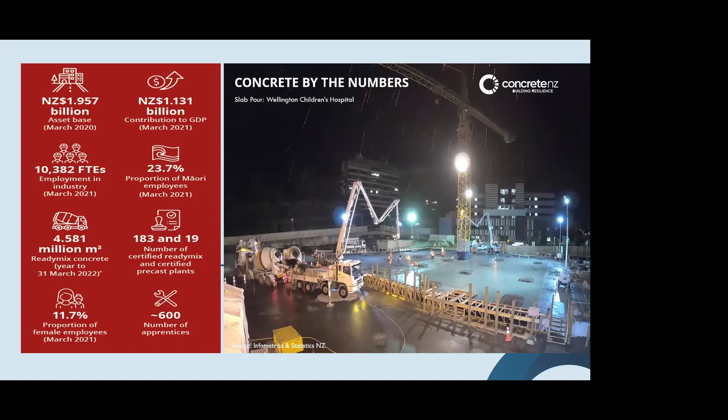So I also want to talk a little bit about concrete in the past, and how concrete can help us get on with the task.

Social responsibility to me means that groups and also individuals are accountable for fulfilling their civic duties, and all actions must benefit the whole of society. There must be a balance between economic growth, well-being, and protecting the environment. As the concrete industry, we have this responsibility as a group, but also as individuals.

Whilst concrete carbon emissions are relatively modest, the issue is that it is the most consumed resource after water. That's why we have to deal with carbon emissions, which amount to an estimated 6 to 8% of all global human-made carbon emissions. I believe concrete has a role to play in a socially responsible society. With concrete, we can contribute to the well-being of people.

Severe weather events have highlighted the need to focus on the twin imperatives of climate change: mitigation and adaptation. Not just mitigation, we have to adapt unfortunately. The impacts from climate change are severe, and adaptation to weather events is necessary when reducing emissions at the same time, for example adaptation to floods.

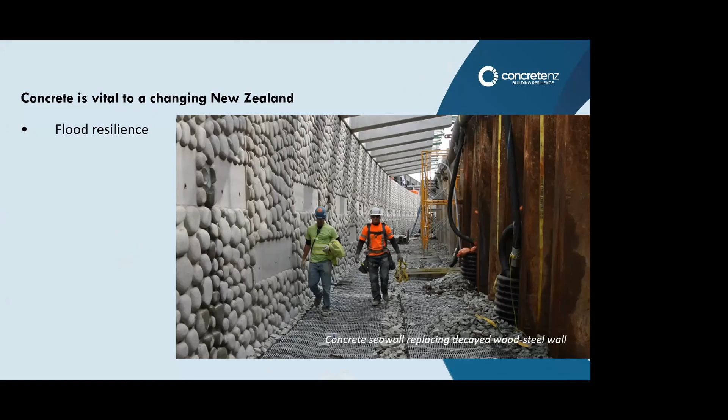There are some great examples of what other jurisdictions have done. For example, in the USA, this is an example from Seattle, Elliott Bay, where they have replaced an existing timber and steel retaining wall and seawall with this concrete wall. It's a great engineering feat, very sophisticated, which includes a marine mattress at the bottom, protecting sea life living in shallow pebbly ground pockets like crevices, and vegetation, and other smaller animals' hiding places, also for young salmon, as I heard.

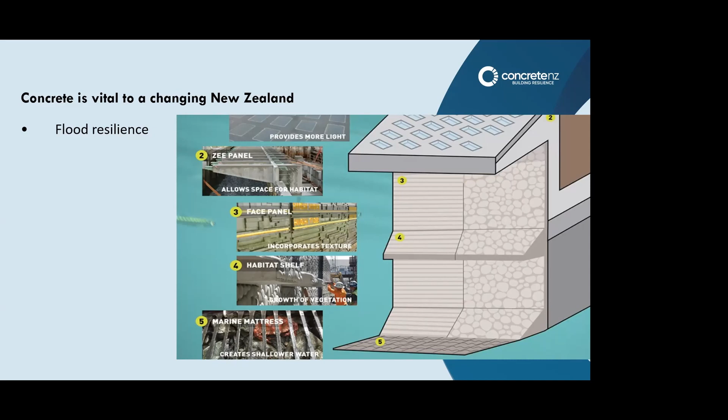This is the same project, so there is light penetrating through this concrete part because they've included glass bricks, so light can get to the habitat area beneath, which again is very important to the smaller parts of the marine life. Textured wall faces allow for growth of shells and other living organisms, and the habitat bench creates a habitat and hiding space for marine life living in shallow waters. So that's one example of how we can not only protect our communities and help from erosion of the land, but also do something for the entire environment, for the marine life as well.

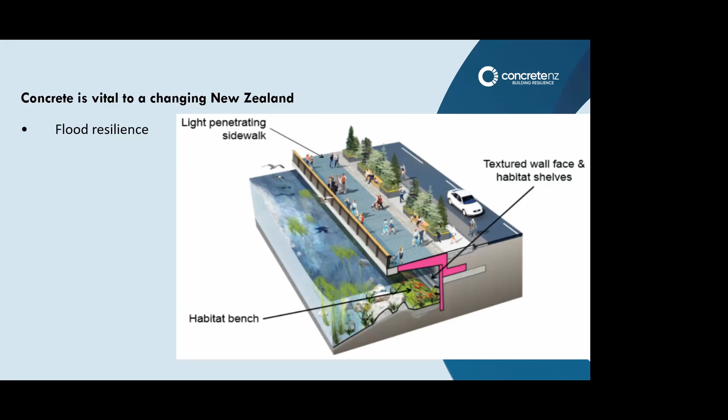Well-being means also the right environment to recharge the batteries, which would be difficult in noisy surroundings. So concrete helps to adapt to changes in the urban environment, for example sound protection at highways, airports, etc. Here's an example many of you will be familiar with - it's at Auckland Ellerslie.

Just for your benefit, how concrete performs: a 150 millimeter concrete wall provides already 55 decibel of sound attenuation. An acceptable noise level in homes is around 30 decibel, 35 maximum, and maybe 25 in bedrooms. For comparison, a jackhammer from a 3-meter distance comes with about 90 decibel. So minus 55 decibel sound attenuation by a wall makes 35 decibel, and obviously the further the noise source away, the better it is.

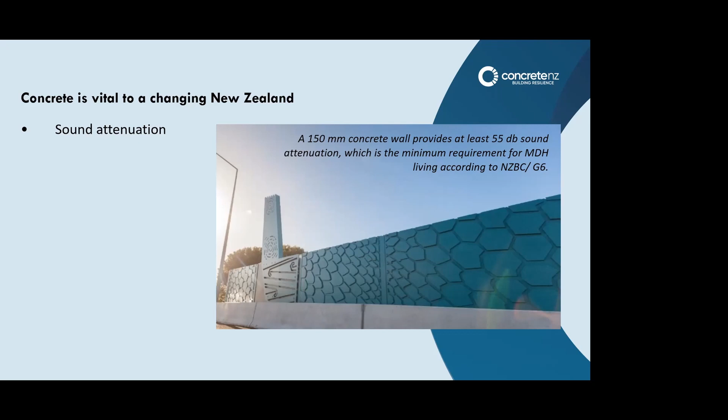55 decibel is also the minimum required for partition walls in medium density housing for compliance with our building code clause G6. Again, a 150 millimeter wall provides that - concrete, or in situ, or precast - or a 200 or 190 millimeter fully filled concrete masonry wall. So sound attenuation is a big feature of concrete structures.

However, there are two differences. There's airborne sound, which is generated by traveling through the air, for example by speaking. And then there is impact sound, which is usually generated by an impact onto a medium like a drum, or like stepping onto a slab. For airborne sound, we say mass is key - the more mass, the better. But for impact sound, we have to, in addition, separate the structural or the stepped-on surface from the structure beneath, which can be done in New Zealand, for example, by a carpet and an underlay.

In Germany, it's mandatory for medium density housing, such as this here, to have a floating screed. So there's a 40-50 millimeter floating screed sitting on, let's say, 15 to 20 millimeter sound insulation material, which can be made of recycled tires or anything else which is sound absorbing. And the sound protection is wrapped around the edges of the floating screed to avoid sound flanking via the walls. This is mandatory and standard for buildings in Germany.

No wonder building in Germany is very expensive, much more expensive than in our neighboring countries like Holland, France, Italy, or the eastern countries. However, concrete is vital to addressing the housing shortage - we will see more medium density developments. Concrete buildings are strong, can house many apartments, all of which are separated by inherent fire protection walls with noise attenuating properties.

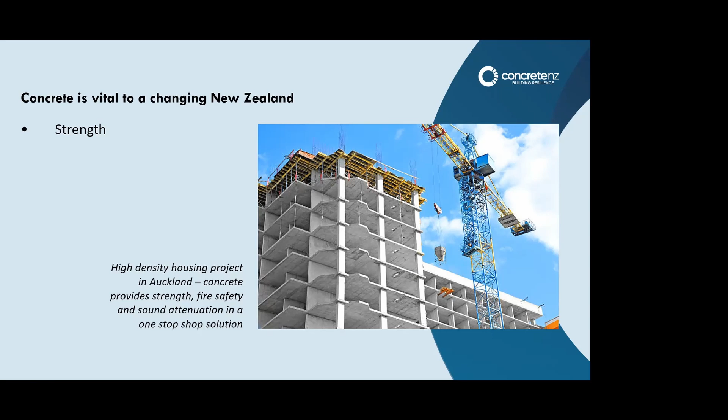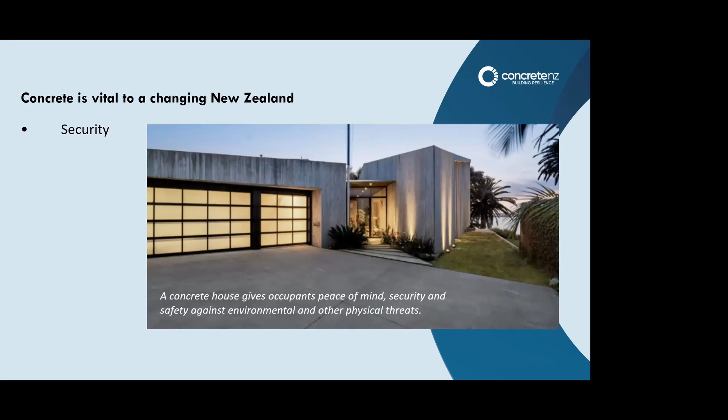For our well-being, it's important that we can live in homes that give us peace of mind, that protect us from the impacts of earthquakes, from weather events, but also from maybe burglary. So it's important we feel safe, and again, a concrete home can deliver that.

Also, in regards to energy and saving resources, if designed and applied correctly, an exposed concrete floor or walls give you the benefit of heat storage, of thermal mass. So in summer, it will take up some of the heat to reduce overheating, and once temperatures drop, it will release the heat back into the space. In general, it balances the climate between the swings, so it's never as hot and never as cold as in buildings which don't have thermal mass.

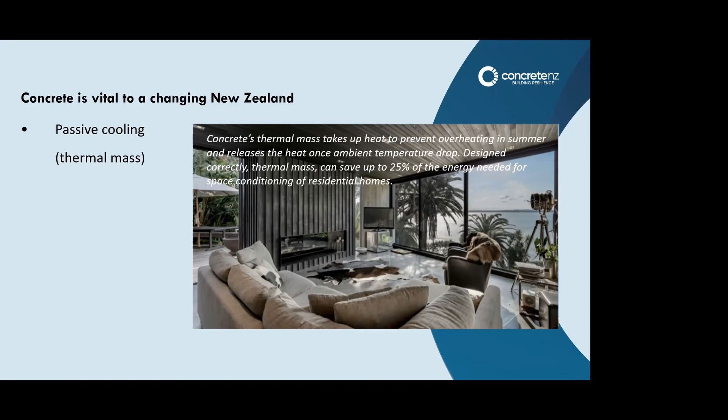This is in-service history of concrete structures lasting long, having adapted through millennia, a testimony of durability. Rome's Pantheon, about 2,000 years old, a very interesting concrete structure. Obviously, back then they did not have Portland cement. They took their cement, or their glue, or their pozzolan, just out of nature, from volcanic limestone, from volcanic ashes. They also included empty clay jugs into the top areas of the dome, just to create some air pockets, to create voids, to reduce the weight. It's a very, very interesting building.

Possibly many have seen it in Rome. There's this always open oculus providing light and some form of ventilation, and if it rains, it really just goes in kind of into the middle. So it's a very, very interesting building, and a stunning 2,000-year-old concrete surface, fair face concrete surface.

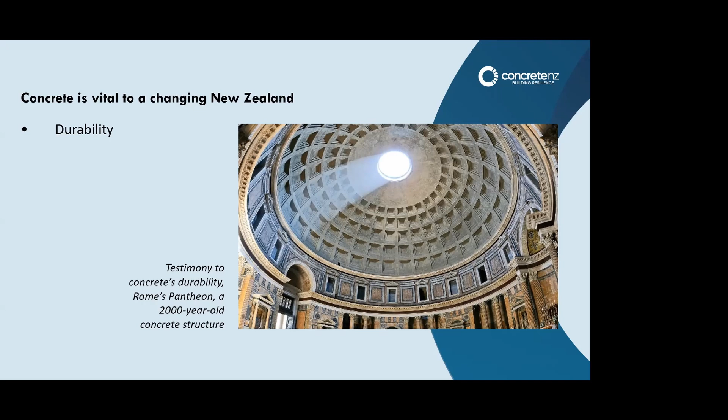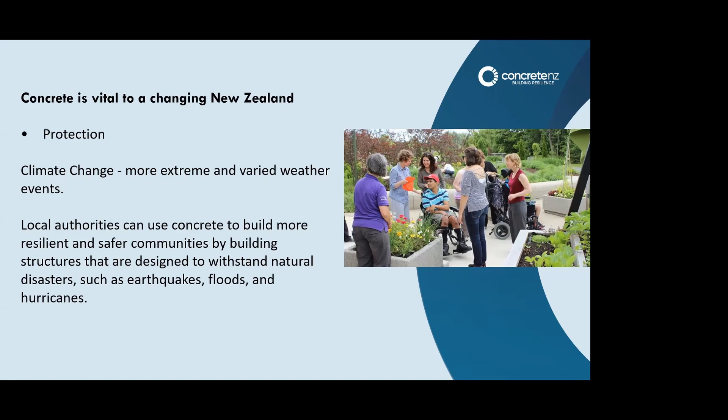Concrete is vital to a changing New Zealand. We have our communities, also our elderly, who must be included into the society. They want to meet with younger people, and we need those shared spaces, maybe gardens where the young and the older ones and the middle ones grow their veggies and plants together. And the surrounding and everything should be made durable, so that the spaces can be used for a long time without needing repair or replacement.

In 2019, the IPCC, Intergovernmental Panel on Climate Change, recognized concrete as a carbon sink. There have been studies for a long time. One person did some research and looked at the potential carbon storage from the 1930s to today, and he had some amazing results there.

So how much carbon is absorbed by concrete can be calculated by an appendix to EN 15804. That only accounts for the externally exposed concrete, where there is carbon in the air, and then concrete can take up parts of the carbon. EN 15804 is the standard for creating EPDs, environmental product declarations, and the Building Research Establishment has developed the formulas and the standard for how much carbon is actually absorbed per square meter of exposed concrete.

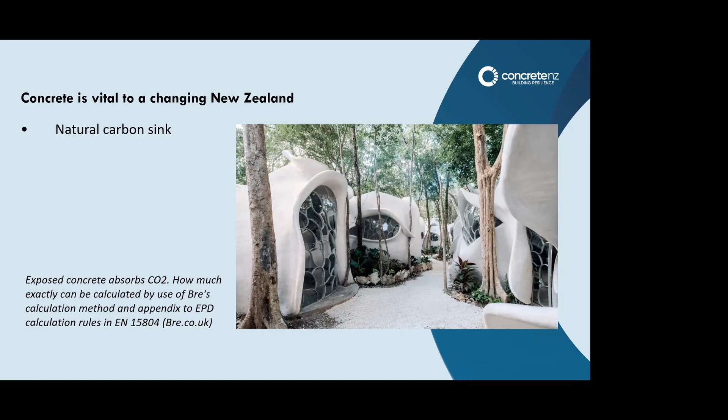It depends on many things - on the concrete, on the quantity of cement, of supplements, and a couple of other things. So there are various formulas which can be used by engineers. I don't say it's super easy, but for engineers, who are all very clever and logically thinking people, I think it should be relatively straightforward to use those formulas.

So once again, I believe concrete is vital to a changing New Zealand, and we can definitely contribute to an environmentally friendly and prosperous New Zealand for the future with the properties of the material concrete. Our structures are strong, durable, fire resistant. They provide sound attenuation, we have thermal mass, and concrete homes give you a good, safe feeling. Exposed concrete is a natural carbon sink, and we are able to create structures helping to adapt to the impacts from climate change.

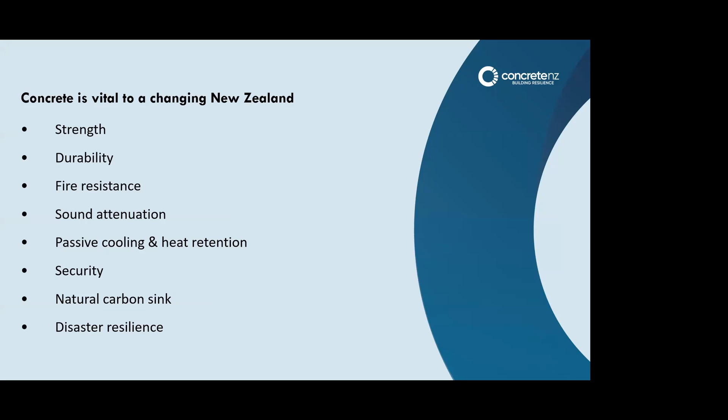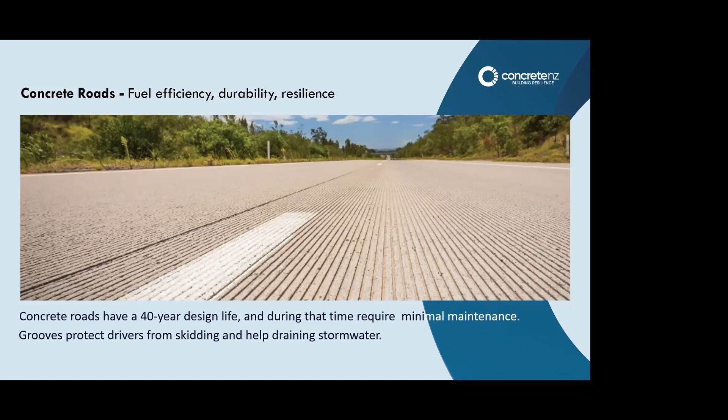So again, one more little chapter before I go to our roadmap. Let's have a look at some applications of concrete, and here the benefits of concrete roads. For example, concrete roads typically have a 40-year design life, and during that time require minimal maintenance. In contrast, asphalt surfaced flexible roads last about 25 years and require regular repairs and maintenance, particularly if heavy vehicles cross the street. And it's not just the costs and the resources for the repair or replacement, but also the disruption of traffic, leading to traffic jams, noise, dust, dirt, etc. So I think there's always a benefit if we use a durable material. The little grooves you see here are brought into place to prevent skidding, the cars from skidding.

I'm aware of a study from the Massachusetts Institute of Technology. They looked into the fuel efficiency and also durability, comparing concrete with asphalt road. In essence, what they say is asphalt roads are softer, and cars, and especially trucks, will partly sink into the softer surface, which increases fuel consumption. So if the surface is rigid, cars normally roll more smoothly and more above the surface, which will definitely save a little bit on the fuel side of things as well.

Concrete roads up front are a little bit more expensive, but after about 10 to 12 years, it will turn around because concrete roads need less maintenance.

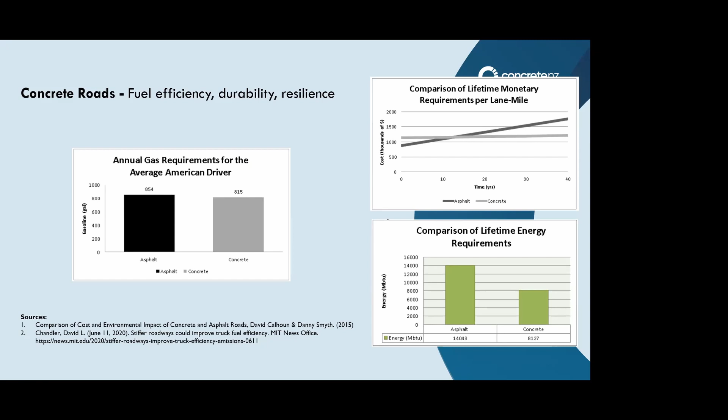In general, for buildings and homes, concrete provides safety, security, and fire safety. The performance of concrete walls, floors and structures in regards to the provisions of fire safety is described in standard 3101, and partly in 4230 for masonry structures.

For example, a 100 millimeter thick concrete wall gives you already 2 hours of fire protection. 165 millimeters adds up to 3 hours, and a little bit more gets you to 4 hours. So it's very good in regards to fire performance and noise.

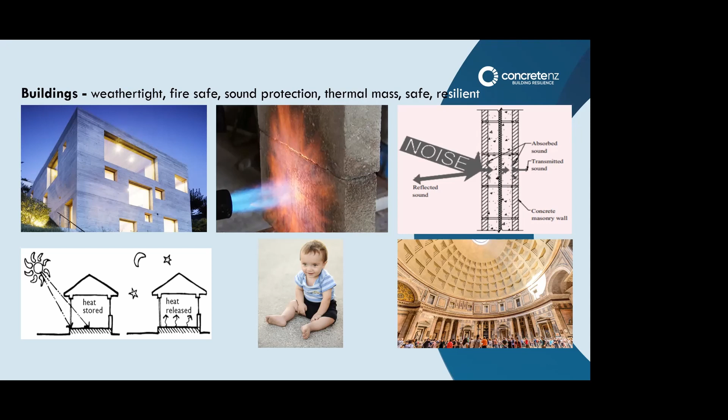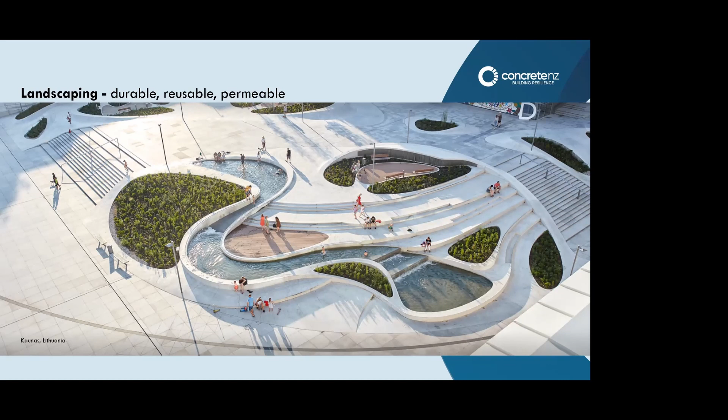Some of you may be from Christchurch, and I remember Christchurch about 10 to 12 years ago - they had some issues with natural stone pavement around the Cathedral Square. The paving was not up to take on bus traffic loads and loosened all over the place. The consequence was that the natural stone pavement was replaced by concrete pavement, which is able to take up the heavier loads from bus traffic.

Then, of course, there's pervious concrete, which allows rainwater, stormwater, going directly through the paved surface into the soil, which is a relief to our sewerage and drainage systems. That has been used frequently for pathways, for walkways, and also in residential areas around schools. It's particularly great for car parking, where the cars are parked. For actual roads, it's not recommended because it's not really strong enough, but for cycleways and for pedestrians, and just for standing cars, it's very suitable.

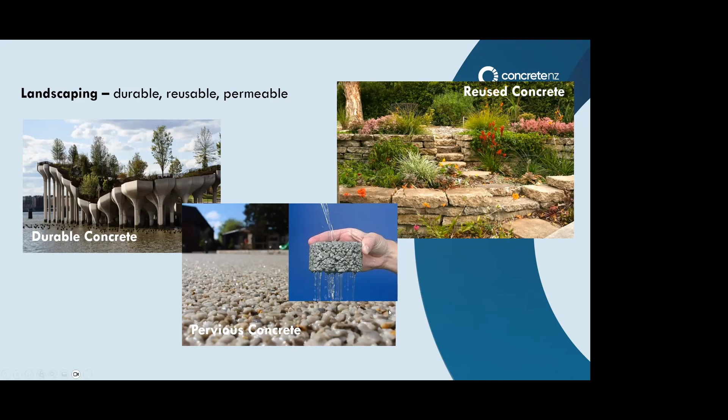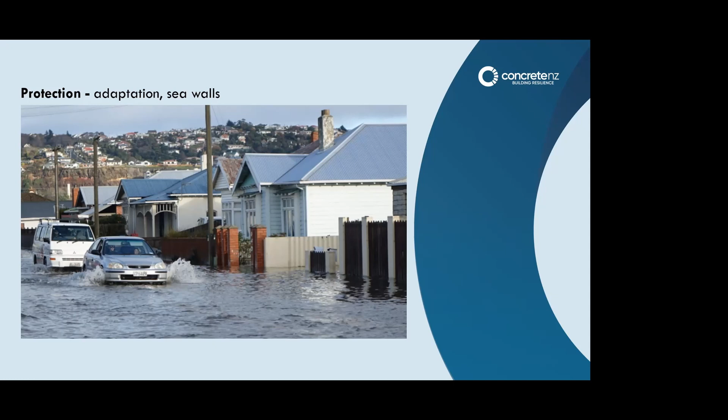Protection, adaptation, sea walls - concrete can definitely help to adapt to the impacts of climate change. I think we all remember the sad, terrible events from last year, the flooding in the area of Gisborne, and in that area it was really terrible. But concrete can help to adapt to rising sea levels by creating concrete walls that can be covered again with some soil, which of course will get washed away over time. But you will find also that smaller marine life will find their pockets here in the newly built sea walls.

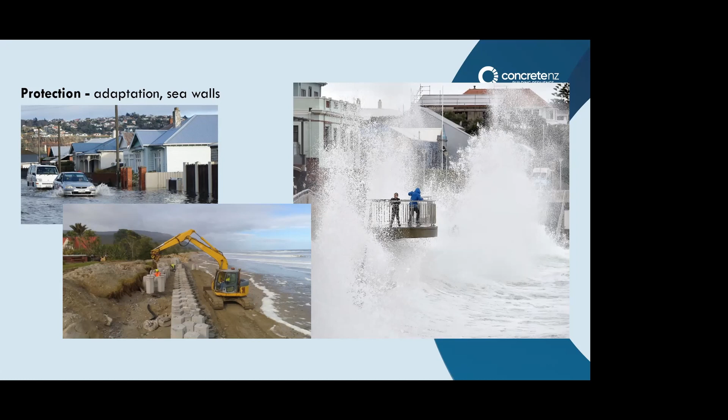This is an example from St. Clair in Dunedin, near the swimming pool, which is a stunning feature. The swimming pool is surrounded by concrete as well, and I like it when the water sometimes comes over the wall actually into the pool on very stormy days.

Concrete helps to connect our societies. Concrete helps to deliver goods, food to people. Concrete enables businesses. Here are two great examples of really high-tech concrete engineering.

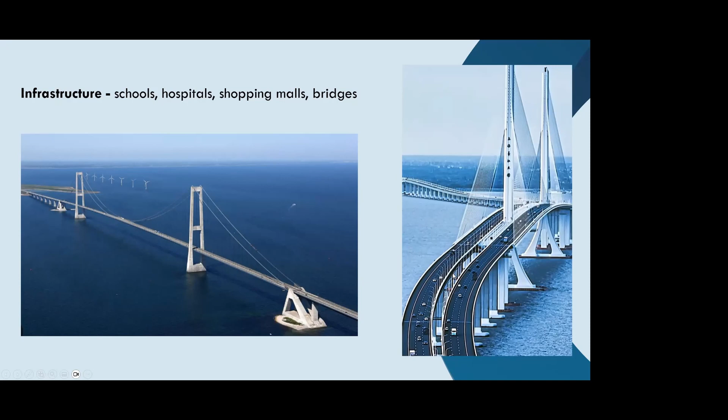Well-executed engineering features the Storebælt Bridge in Denmark, connecting parts of the country over kilometers, or the Sutong River Bridge in China, which is even longer, a tall concrete bridge also carried by steel cables. So really stunning examples we have in infrastructure.

Other examples are museums, theaters, schools, swimming pools, or the women's hospital here in Christchurch, which was able to withstand the earthquakes in 2011 more or less without damage, whilst the building next door had to be completely demolished. The women's hospital is actually a concrete structure sitting on base isolators, and as engineers you know that on base isolators the structure should be rigid so that the building moves in its entirety.

If it would be a ductile building, you would experience swings amplifying to the top of the structure and leading potentially to collapsing. So this has performed well on base isolators.

There are other great examples: base isolated building, the Te Papa in Wellington, also the library in Wellington, even retrofitted a couple of buildings at the university in Wellington as well. So there are systems in place. The other one would be Nigel Priestley's press system. So there are definitely systems in place, and again, this is not really so much a matter of material, but more of design, of engineer design to create these damage avoiding buildings.

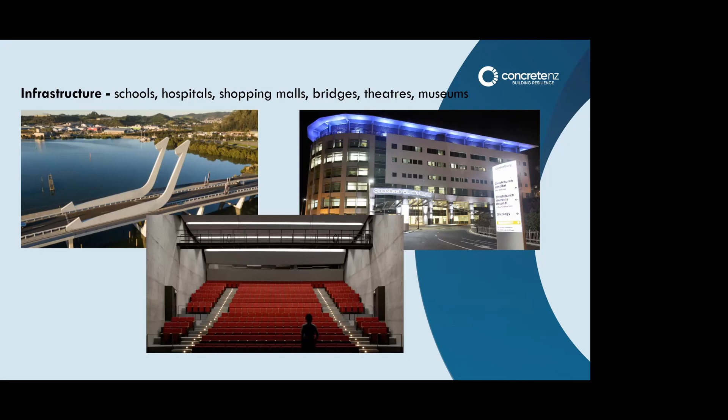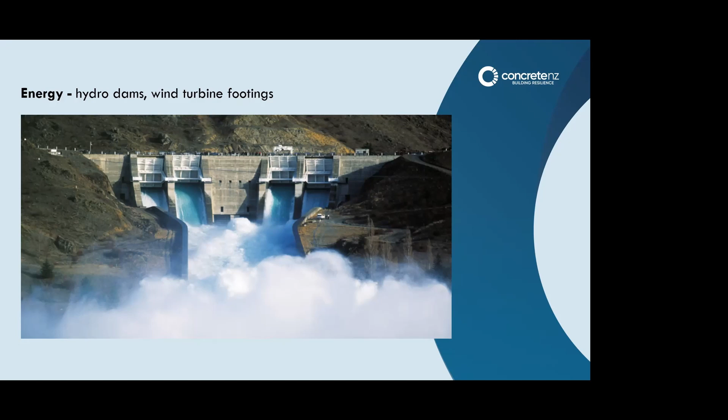There are several smaller dams creating the hydro dams and hydropower. And then we have an example here from Wellington at Makara, the wind turbines, and obviously it's not about the gravity loads, even though they are heavy. It's more about the wind loads pulling on the foundation. So we have huge concrete foundations sitting beneath the wind turbines here. So they're all really important examples of how concrete can help us.

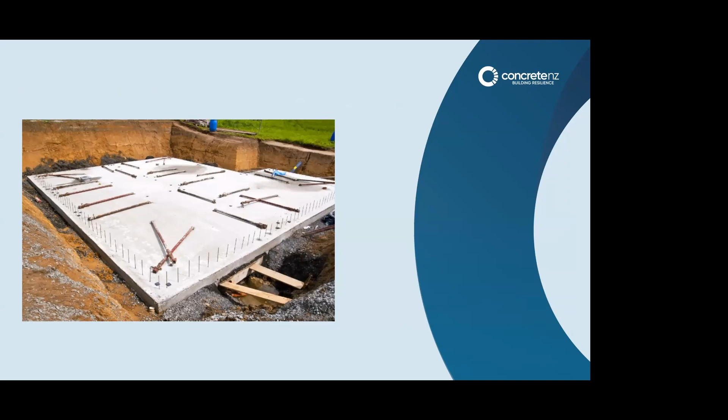And then, of course, possibly the most common application of concrete in New Zealand are slabs on ground and slabs for driveways, etc. You are familiar with, well, they're no longer new, but after the Christchurch earthquakes, we changed a little bit the reinforcements, 2D12s here into a 1D12 and a 500 mesh in the middle of the slab.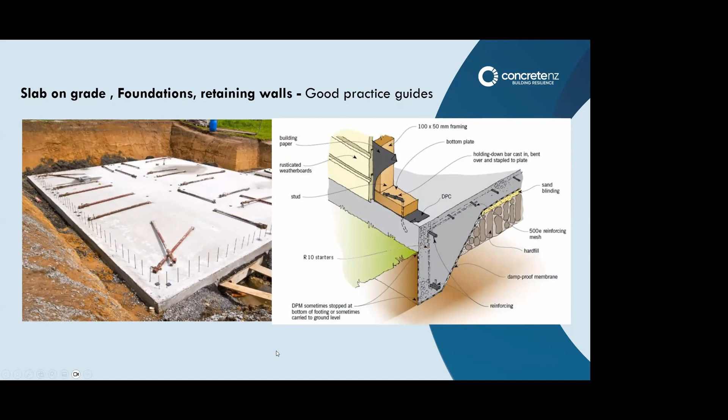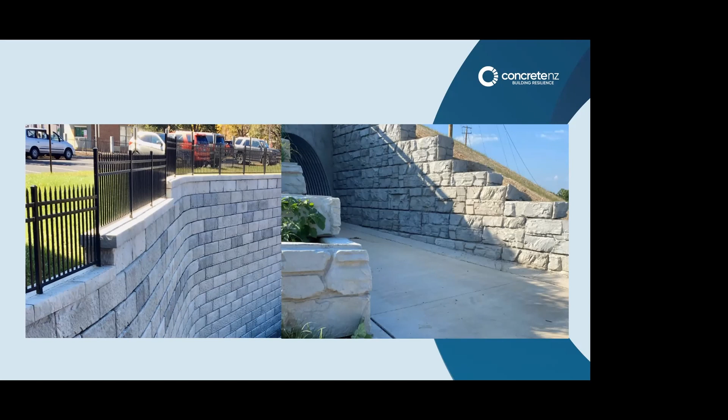And then, of course, retaining walls, ensuring land does not collapse around buildings, around roads and tunnels, and around infrastructure. So there's definitely a reason why concrete is the most used material on Earth.

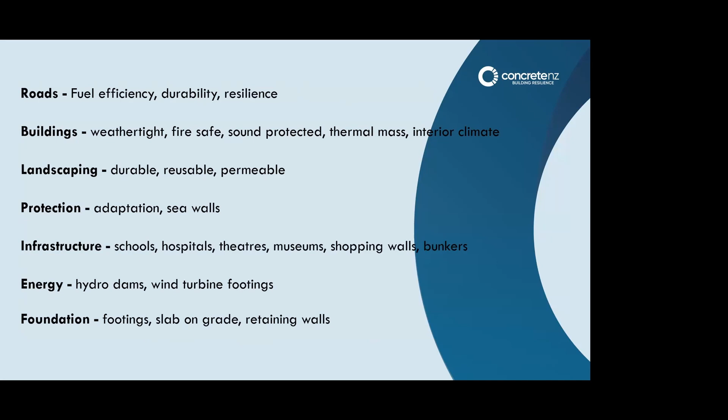And yeah, you just saw a couple of examples here: the roads, the buildings, landscaping, adaptation, seawalls, infrastructure, energy generation, foundations, and so forth. So there are good reasons to use concrete.

However, the benefits of concrete are well documented, but as any other material, we must cut our carbon emissions. About 80% of all the emissions associated with concrete are coming from cement production. And here, if we look at cement production, 40% of the emissions from cement production are coming from the use of fossil fuel, which is mostly coal.

But the larger part, 60%, are developed in a chemical process when we separate lime from the limestone within the kiln. That's a chemical process called calcination.

And we have to work on reducing our emissions. As I said, in itself, concrete is a low carbon material. 1 ton of, say, 25 MPa concrete comes with about 100 kilogram of carbon per ton. So per cubic meter, that's around 230, 240 kg, given the density of 2.4 ton per cubic meter, so that's around 100 kg per ton.

In comparison, aluminium comes with 20,000 kilogram per ton. But of course, aluminium is not used in the quantities as we use concrete. Aluminium is really just there for maybe windows, a couple of other smaller things.

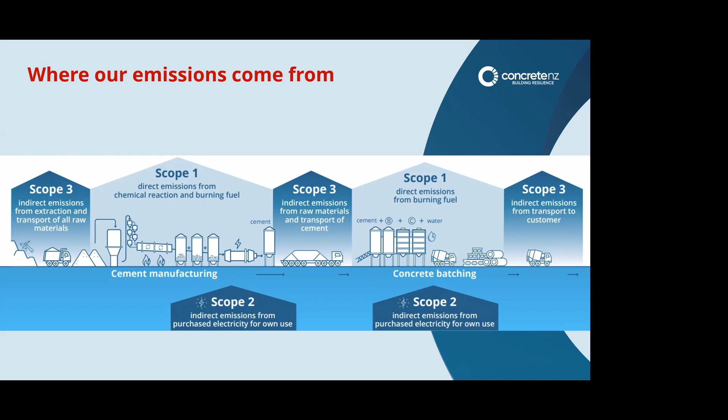There is a little movie here. I'm not sure if I should show it, but maybe we'll just put it on if it works. It's just 2 minutes - Block of Civilization.

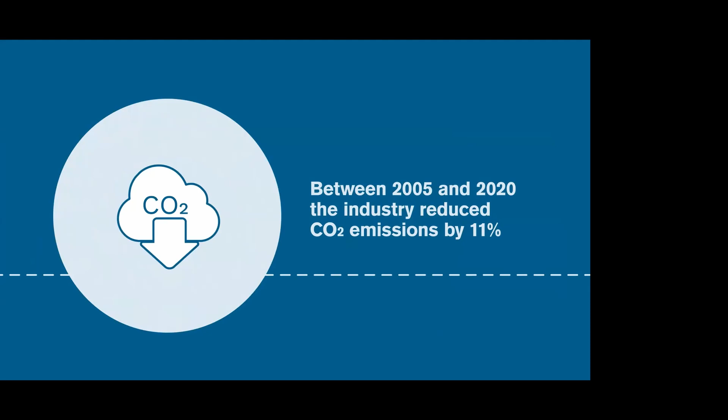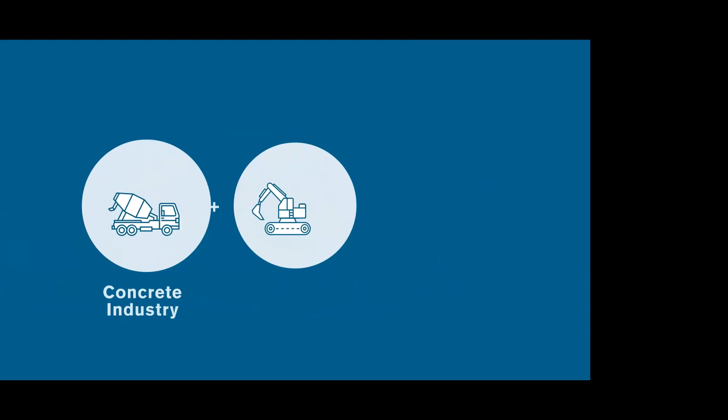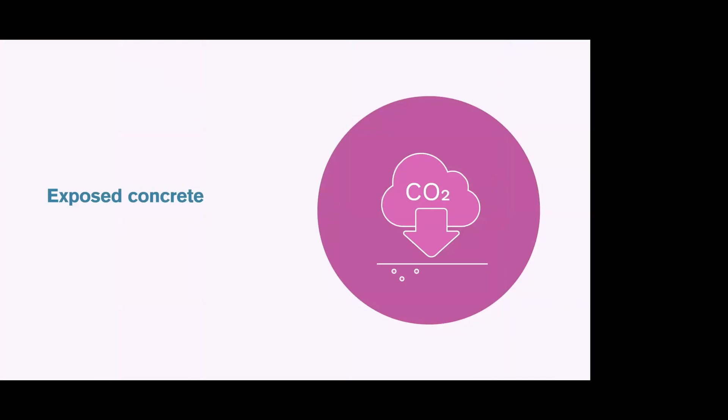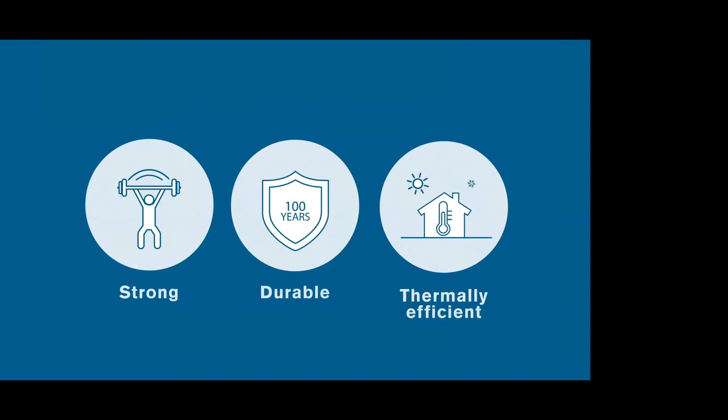As Aotearoa New Zealand moves towards a more sustainable future, the concrete industry is making changes to be net zero carbon by 2050. Concrete New Zealand's membership makes a significant contribution to our construction sector. Together we're committed to playing an important role in mitigating climate change by reducing concrete's carbon emissions. We've already started our decarbonisation journey. Between 2005 and 2020, the industry reduced CO2 emissions by 11%, even though ready-mixed concrete use increased significantly during that time. We've also developed a roadmap that will ensure our place in 2050 is sustainable, circular and net zero carbon. It will require a collective effort from ourselves, our construction and research partners, and the government to achieve this goal. Here's how: increasing the use of alternative fuels to replace coal in making cement clinker; partial replacement of cement with low carbon, natural or recycled materials; efficiencies in concrete production; design and construction optimisation; recognising carbon uptake, which sees exposed concrete absorb CO2; further decarbonising New Zealand's electricity grid; and capturing remaining CO2. Concrete is essential to New Zealand's future resilience. It offers fire resistance and adaptability. Concrete is also strong, durable and thermally efficient in the face of extreme weather events that will become more common with climate change. There's a long road ahead, but we have a plan and the ambition to achieve a net zero carbon concrete industry for Aotearoa, New Zealand by 2050.

Thanks for listening to that. So what does this actually mean? As we heard, we have already reduced our emissions by 11% since 2005 values, against an increase in concrete production. We are now in the middle of the 2020s, which is the decade to deliver. So what have we done so far?

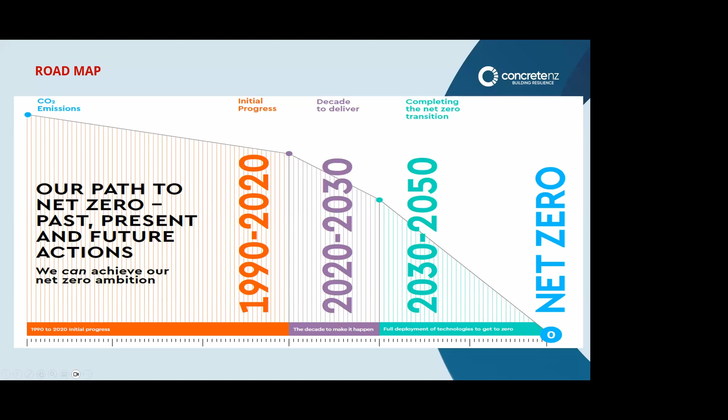For example, Golden Bay Cement have replaced parts of the coal used to heat the kilns with waste timber. They still cannot replace all of the coal because some of that heat is very specific and strong, which we still need. But a beginning has been made, and last year alone 38,000 tons of waste timber was incinerated and used to replace coal as a fuel for the cement kilns.

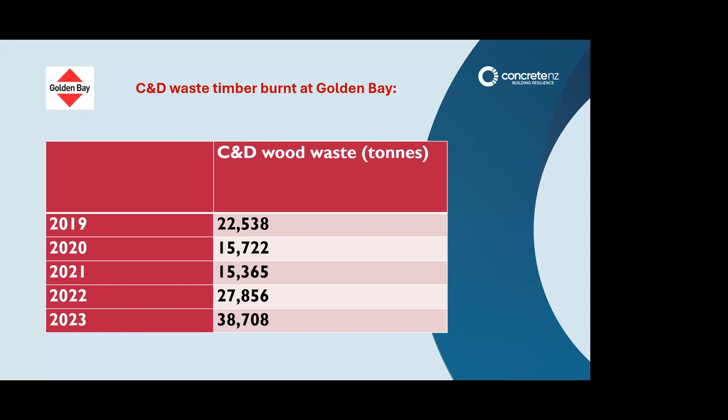The first ever environmental product declaration, or EPD, undertaken in New Zealand was published 10 years ago, commissioned by Allied Concrete. The concrete industry had its first EPD done in July 2014, so concrete was the first material with EPDs in New Zealand. This has been helping towards accurately monitoring our progress and defining clear reduction targets.

In the meantime, many of our concrete manufacturers have produced their EPDs - Firth, Bridgman, Stevenson, Higgins, you name them, they all have their EPDs.

Here is the example from Firth's EPD, and I've put up the 25 MPa mix. As we can see, the South Island average is 230 kilograms per cubic meter - these are all cubic meter units, so which is a little less than 100 kilograms per ton. It's even less in Blenheim, at only 215 kilograms per cubic meter. So it's great to have the data, and obviously we have to get lower beneath these numbers.

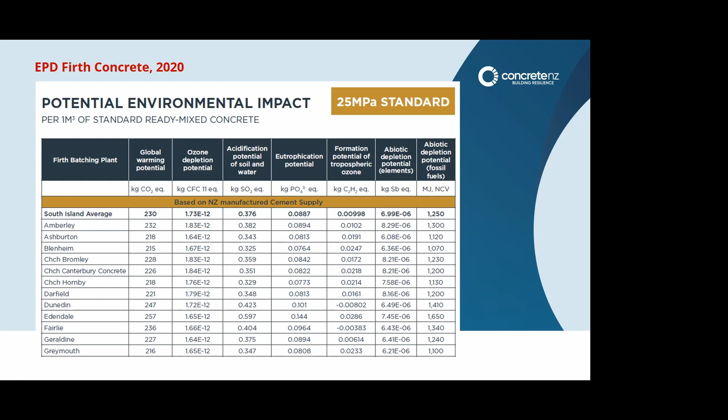So, what does it mean, and how does it look like? Cement supplements, we call them supplementary cementitious materials, in short SCMs. What options do we have?

We have basically two options: industry byproducts or natural products. Industry byproducts are, for example, fly ash, a remainder from burning coal, sitting at the top of the chimney at power plants. This allows a replacement of about 30-35% of cement, and our standard 3101 at the moment allows for 30% replacement.

Slag from steel production is much more potent and can easily replace cement up to 90%. However, our standard at the moment says 65% would be the maximum. Everything else would be an engineered mix, a kind of alternative solution. However, it has been done in New Zealand, and I'll talk about that in a minute.

And then there's also silica fume, also an industry byproduct, from silicon production and silicon alloy production. The replacement value is about 10%, not really much more, but silica fume is more used to enhance the strength of the concrete.

I think you're familiar with our concretes. Our concrete standard 3104 allows for three types: ordinary concrete, special concrete, and prescribed concrete. Ordinary concrete is all concrete between 17.5 and 50 MPa, which comes from a batch with liability or the testing regime done by the batch. Concrete above 50 MPa, or having more than 65% slag replacement, is special concrete, subject to a concrete materials engineer, and the liability is with the engineer.

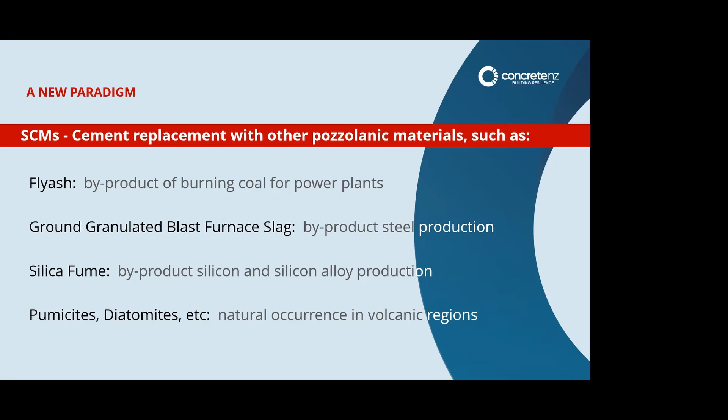And then we have prescribed concrete, which is self-made concrete in mind - for example, a farmer where the concrete truck can't get there in time, since after 90 minutes it goes off. So there's also a prescription of concrete. 50 MPa is often used for engineering and infrastructure projects, bridges, or even higher. But with silica fume, we get our concrete to, let's say, 150 MPa, which also creates nice and slender elements.

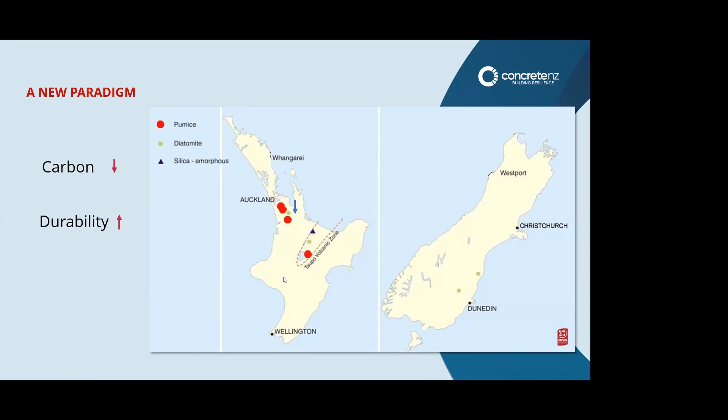The other option is natural pozzolan, something the Romans used. Volcanic ash, for example, occurs in the Taupo Central Plateau region near Auckland, but also diatomites, which is in principle compressed algae, occurring around the Dunedin area, and natural silica, which we have also in the region of Taupo and Rotorua. We undertook a study with Canterbury University to look at replacement levels.

At the moment, we talk about 30% replacement levels, and we still have to ensure access to these natural pozzolans. Obviously, we can't just mine the whole mountain away, because we have to consider the environment, cultural heritage, and all the things, and come to sensible, meaningful decisions. Our standards need a bit of review to allow for higher natural pozzolan replacements.

And for you, obviously, you want to know that these new concretes with cement supplements perform, that they give you the target strength at a certain time. Obviously they cure a bit slower, so maybe 56 or 90 days is the time to achieve target strength, not 28 days. We need to educate our technicians and placers as well, to explain to them how best to place and work with these concretes. And it must economically make sense, but this has already been proven that it would.

So a couple of things to consider still. But what else are we doing? What else have we done already within this decisive decade of change? Since August of last year, Holcim have begun operating a large cement blending mill in Auckland Harbour.

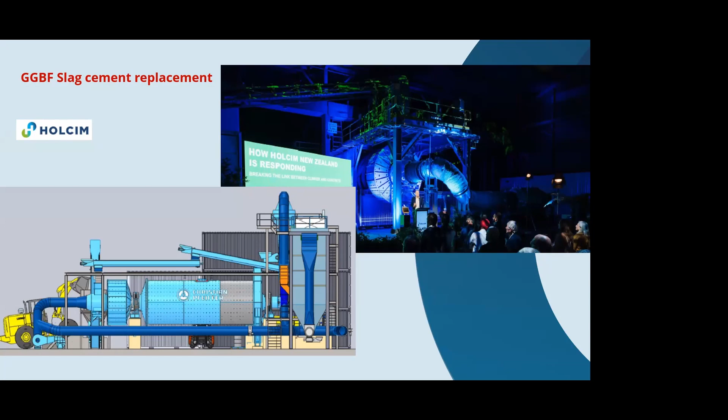Here we blend the cement with SCMs to make a low carbon concrete - a mixed glue or cement, let's call it low carbon cement. Holcim also imports slag, which has huge potential regarding cement replacement and thus carbon reductions. So here are a couple of projects which have been done with low carbon concrete.

At the Hunua 4 tunnel, we used fly ash and actually achieved a 60% replacement. At City Rail Link, one of the very prominent projects, 30 and 40% fly ash mixes have been used. The highest cement replacement so far was achieved by Leighs Contractors, in a project still under construction in Christchurch on High Street - an office building where they replaced 70% of the cement.

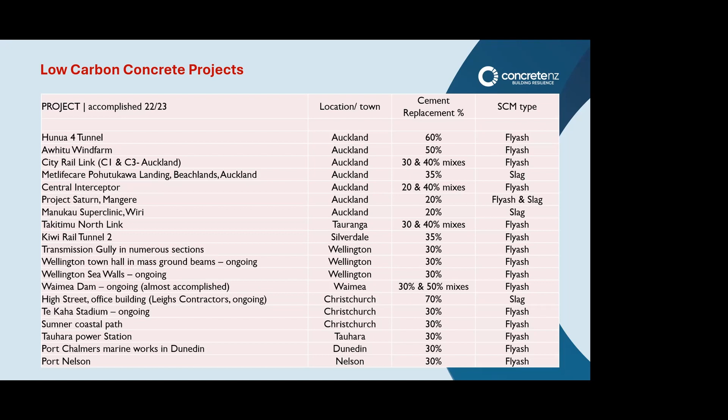It's a huge benefit, and that would translate to roughly 55% carbon emissions reduction from the concrete per se, just from the cement replacement of 70%. So this is happening at the moment, and ongoing, with cement replacements ever increasing. The next stage would be getting our natural supplements more used and market ready.

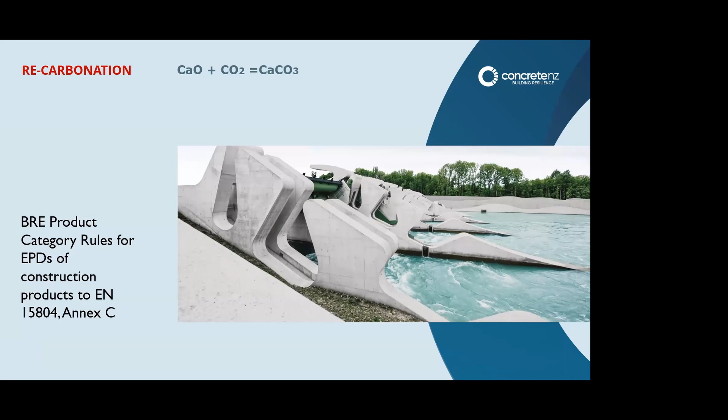On our pathway towards carbon zero, there is a bit of help from the concrete itself. Concrete absorbs carbon dioxide when exposed to the atmosphere, and the exact quantities are described with these collections of formulas from the Building Research Establishment, which is an annex to the EPD standard EN 15804.

That's been since 2012, but is still an annex to the new version. There's a newer version of EN 15804 from 2019, and there's a bit of difference in how biogenic carbon is treated. In the past, it could just be deducted, but the new standard says because of the uncertainty at end of life of building materials, in a whole of life scenario, biogenic carbon must be shown as a positive. So a couple of changes in the 2019 version.

But the formula for engineers to determine exactly what quantity of carbon is saved per square meter is described in this Annex C, carbonation of products containing calcium oxide and calcium hydroxide materials such as cement.

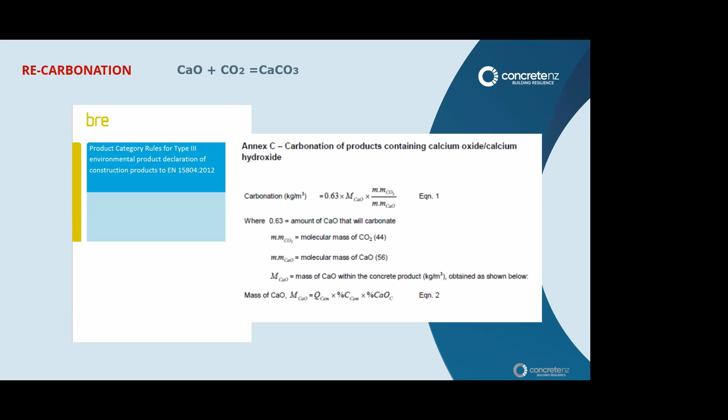The carbon is absorbed by a device, normally manufactured by Linde, one of the largest manufacturers of these devices - they've been in the gas business for maybe 150 years. This is transported to the sea, and the carbon is injected into the ground under the seabed, 1 to 2 kilometers down, into areas where the carbon dioxide finds calcium and oxygen, because it creates a bond: calcium plus oxygen plus carbon dioxide, so Ca plus O plus CO2 makes CaCO3, which is limestone. So it basically comes back to be stone, natural stone.

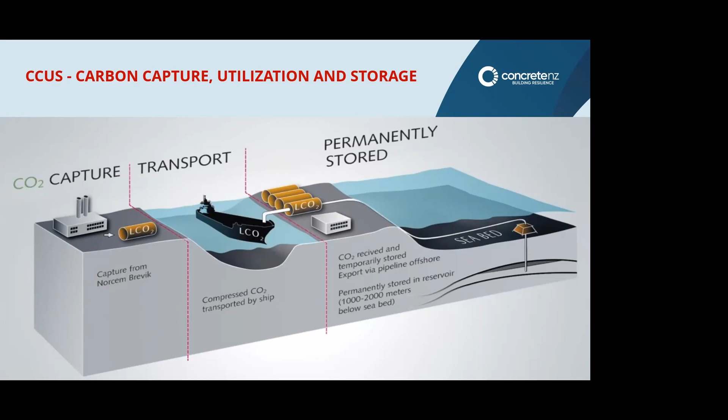But it will come to New Zealand sooner or later as well. This is one of the devices, a carbon capture plant from Linde. They do lots of business, and it's quite serious stuff - very, very good.

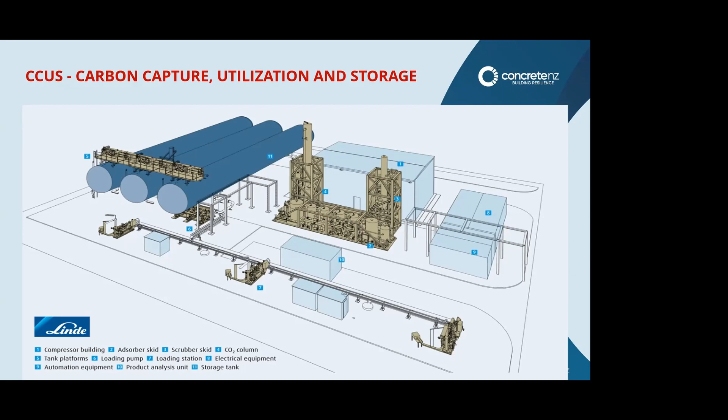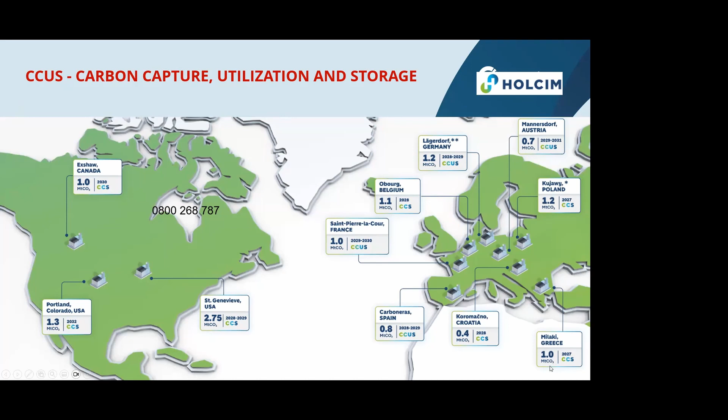Talking about our stakeholders here, Holcim - we have an overview of the carbon capture and storage plants and some utilization plants by Holcim, but none of these are in operation yet. The first one will start in 2 or 3 years in Greece, which will capture 1 million tons of carbon dioxide. But globally, there are already about 25 carbon capture plants operating, with many additional ones under development.

This one here is Marsden Point, an oil refinery. Their carbon capture plant opened in 2016, but since the previous government supported the closure of the oil refinery, the carbon capture plant has also been shut down. So we need to find new ways to capture our carbon. As technology becomes more available and affordable, its adoption in New Zealand is really just a question of time.

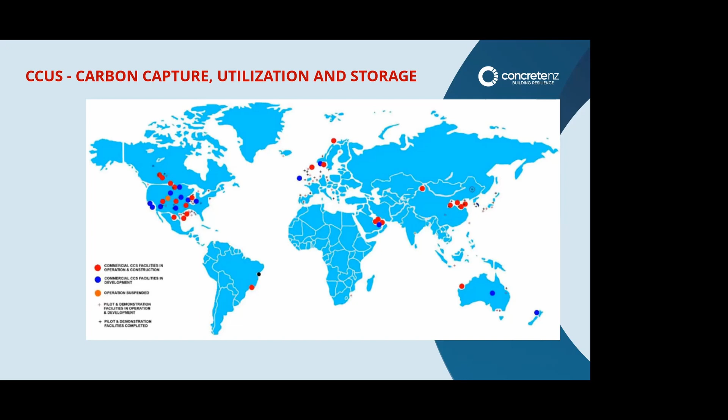Also, you may be interested in this - I think most of you are familiar with the IStructE, the structural engineers in the UK. They already have online a collection of initiatives, documenting how it progresses and which stage that is at the moment. I'd recommend you check them out if you haven't already - they're called IStructE, structural engineers in the UK.

But coming back and concluding with this slide - this is our concrete road. Before, I had the pleasure to show you what we have already done: replacing coal with waste timber, doing our EPDs, using more and more SCMs, mixing and blending cement with SCMs. But in essence, our roadmap stands on these 7 columns.

The first one is the clinker. This is still cement production, but as I mentioned, we use biomass waste to fuel the kiln rather than coal, and also aim to get CO2 capture, direct capture kilns.

The next column will be cement and binders, which basically talks about the SCMs, the fly ashes, the slags, the silica fume, and the natural pozzolans. Concrete production at the batch plant.

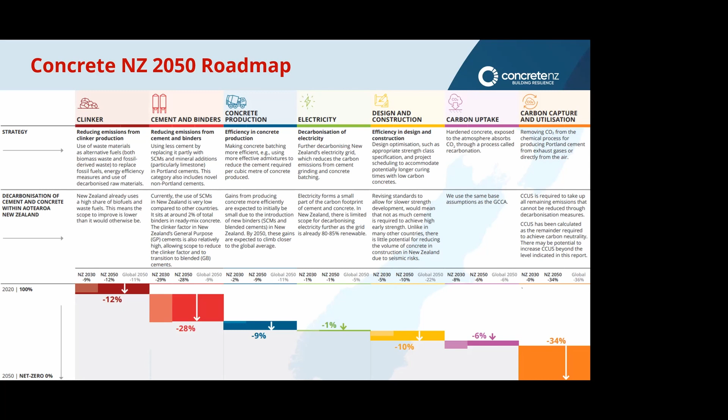Holcim, just in August, not just opened their mill, they also brought in huge amounts of slag for our concretes. And then we think that 2050 net zero carbon concrete is absolutely realistic for New Zealand conditions.

With all our efforts, it's important that we work together on this with the government, with the engineers and customers and developers, because it will take all of us in the industry to reach our net zero carbon goal. If we take on our social responsibility, I'm sure we will get to that far more quickly than we thought.

With this last slide here, I would like to say thanks for your attention, but I'm sure you may have questions, even though I'm only here in place of Gaimster, our CEO, who was supposed to be here, who is an engineer. So I'm just an architect, no concrete engineer, but I'll try my best to answer your queries and otherwise forward those questions into the right direction. So thanks for your attention so far, and maybe I stop sharing my screen.

Cool. Right. Good, Brendan. Thank you, Ralf. Yeah, brilliant. Let's open the floor for a couple of questions. Do you want to jump in? Yeah, Brendan, Neil. Neil, go for it. Neil, sorry, you're muted. You're muted, Neil. Right, there we go. Try now. Okay.